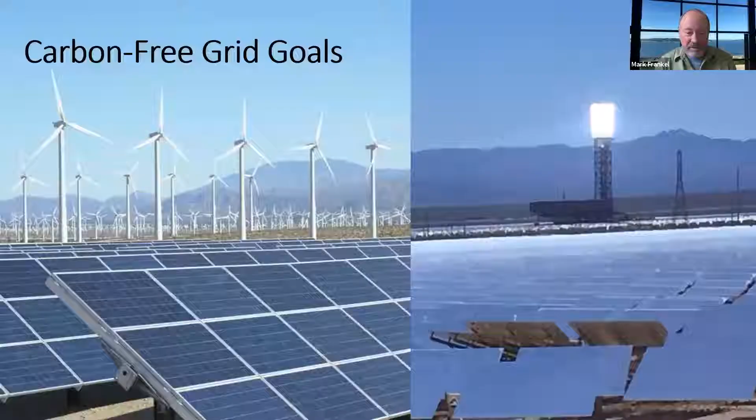Great, thanks Ben. I will say this is an unenviable task to introduce a topic that's going to take us years to resolve in 5 minutes. And I will also tell you, attendees, that the panel group here has been talking about this for years. So if we get carried away in acronyms and topics that you don't understand, please ask for clarification. So I'll pick up my pace so I can get through this really quickly.

So you all know that we have set grid carbon-free goals for the grid in the US. Some regions are tackling this aggressively. The West Coast and East Coast have really aggressive goals to decarbonize the grid. There's a lot of renewable energy sources coming onto the grid, and these are less controllable. They're more episodic, and we can't dispatch them in the same way as we can conventional resources. But even though we have all these new renewable resources, we still need peak load at peak times, whether that's coincident with the renewable resource or not.

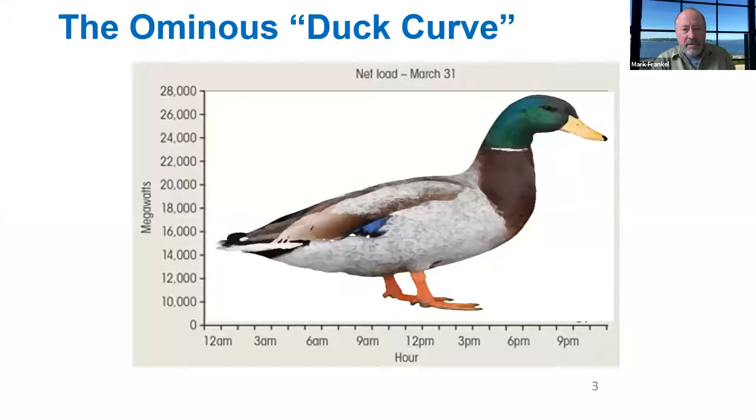So you've all heard of the duck curve. Next slide, please. This is the way it's playing out in California as they add solar to the grid. In the middle of the day when the sun's out, there's more and more sun available, so a greater and greater percentage of their daily load is generated by solar. But in the evening and in the morning before the sun comes up, they still have the same peak load as they ever had. So the head of the duck, if you will, on the right side, you can imagine their peak load is just as big as it ever was, and it's after the sun goes down.

So they still have to have all the same grid resources, the peak power resources on the grid available to meet that load, even though they never get to use those during the day because the sun's out. So those resources are more and more expensive to run relative to the annual use of those. And so the utilities are driven to start thinking about how can we change the shape of our load to match the shape of our resource.

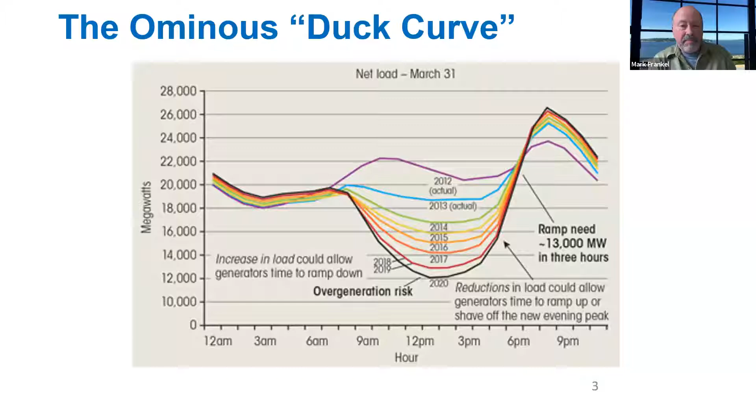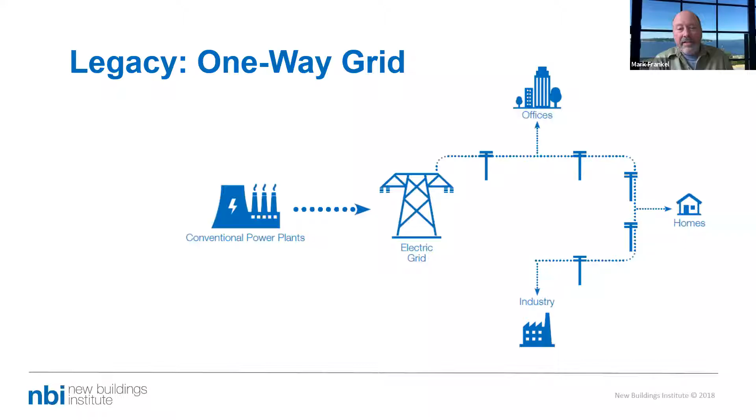Next slide, please. So the legacy grid, of course, the conventional power plants were able to distribute load to buildings and whatever loads in a fairly predictable way, and it was always one direction. It was always the utility supplying the power that they anticipated was needed on the grid. Next slide. The new grid is actually much more complicated, more like a game of Tetris, because there's buildings and cars and all kinds of things putting energy into the grid and taking energy out of the grid at all times.

And it's very, very complicated. The amount of data needed just to control this is massive, and few utilities are really capable of controlling this in the same way. So now we need much more interactive control, and we need these individual loads to respond, to be able to respond, control, and influence the way they interact with the grid. So what does that mean at the building level?

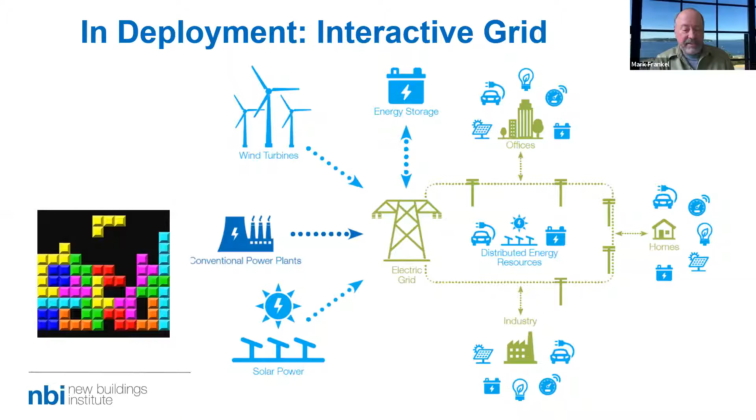Next slide, please. We can think about the load shape of the building. If you have a base load, and very oversimplified, say an office building where people arrive in the morning and the load increases through the day, and we get to the point where we have a peak, and then as people go home, it drops off.

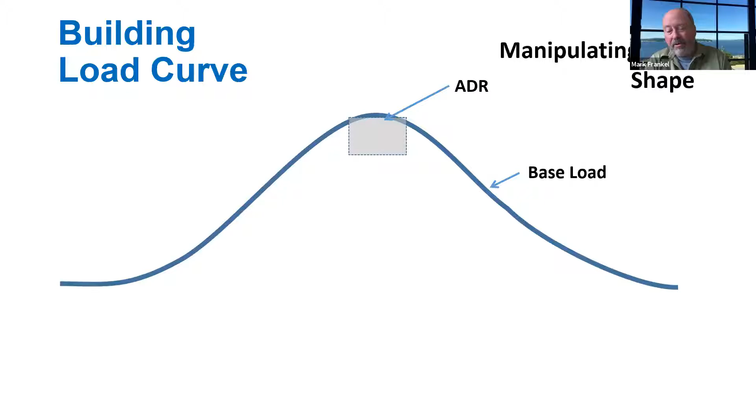So the original way to think about load shedding was automated demand response, and that's the little box at the top there where the utility says, we have a crisis, we need to reduce our load, can you help us? And some percentage of the building stock says, sure, we can cut our load by 15%. They turn off a chiller for an hour or what have you, and that's the automated demand response there at the top.

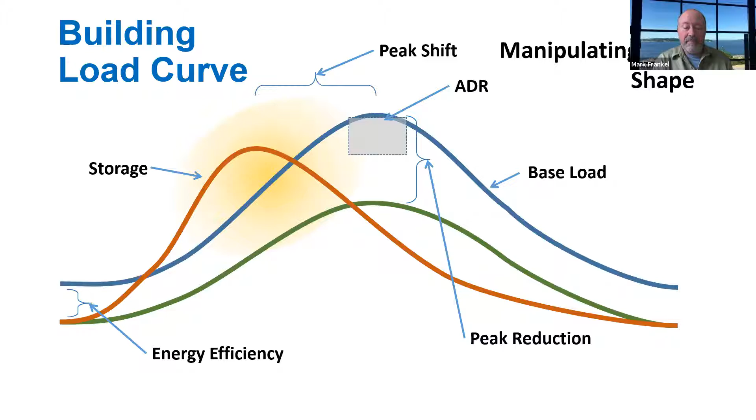But now we're talking about more complicated things, like shifting the time of the building peak. So if you have a lot of sun coming in the morning and you want to shift to use more energy then, maybe with a battery system or whatever, we're changing the shape of the building load to match the availability of resources. I want to point out that there's also a role for energy efficiency still, because we're reducing the total load on the grid, which is good, and we conceivably are reducing the peak load on the grid, peak reduction. So all these are different ways to manipulate the grid, the way buildings use energy and interact with the grid.

Those shifts are referred to in different terms, which you'll hear: shift, which we change the peak; storage, where we might capture energy and use it later; shape, shed, which is reducing total energy use; and shimmy, which is changing the nature in a very short term to manage load energy quality.

So zero net energy buildings have played a role in this shift very significantly. They were maybe some of the first to start pouring energy back into the grid in a somewhat uncontrolled way, as individual buildings build PV arrays and expect the grid to take that solar. So it's important to think about the role of net zero energy buildings in grid integration.

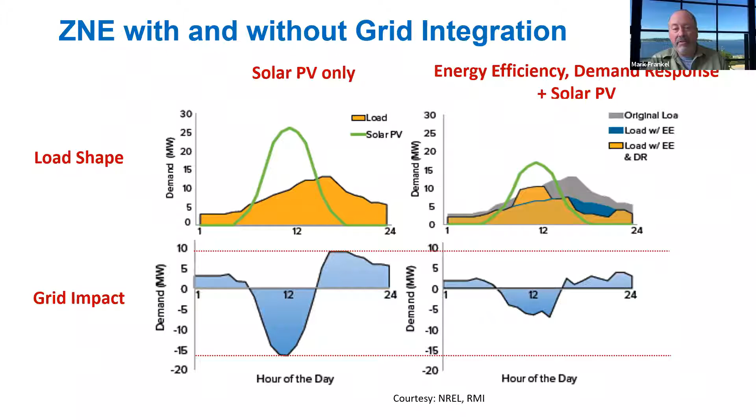This kind of load flexibility, from a study by the Brattle Group, will represent a 15% reduction in peak demand by 2030. And I guarantee you that as more renewables come onto the grid, utilities are going to be more and more incentivized to send a price signal to make sure buildings are responding to their ability to provide peak power.

So finally, I want to point out that this is definitely changing the building industry. We're going to have to respond in real time to changing utility price structures. Designers are going to need to understand and incorporate these strategies that allow buildings to interact with the grid, and this is going to play out for building owners and commissioning agents very much so as well. This is going to be critical to building services, comfort, and reliability. Thank you.

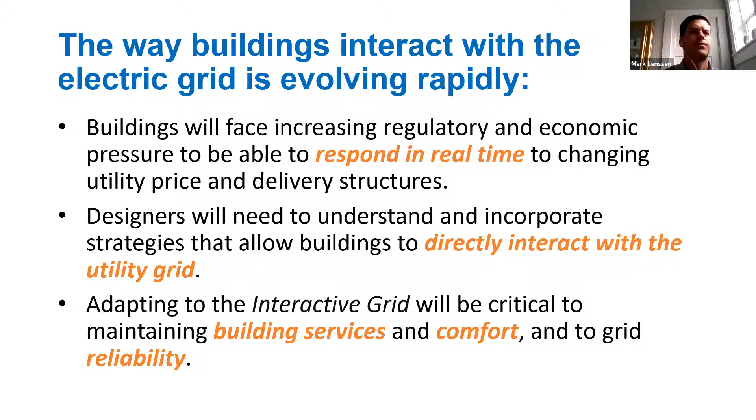Yeah, thanks Mark, good question. So I think there are a couple of key differentiators from how we approach our buildings today - this is true in general as well as how it applies to demand response programs. First is the interoperability and intelligence between buildings and the grid. The second is this level of interoperability and intelligence across building level systems - how we heat and cool and light and fuel our cell phones, in our homes and office buildings. And then the third is really this concept of load flexibility and demand-focused optimization, not just energy-focused optimization.

So really, with demand response programs today, they're often manual. I've heard them referred to as sneaker DR - literally somebody in their sneakers runs around the buildings flipping switches and turning things off. And it's a fairly static interaction - kind of surgical demand response events, just responding to a couple-hour period of time, one-way signals. Oftentimes demand response is met with fossil fuel resources, which is helping but hurting in another way - helping the grid but hurting in another way.

So I think in the future we'd really like the ability to send and receive and respond to utility price signals in real time. And also, one interesting ability would be for buildings to actually send any potential load flex opportunities they have back to the grid, so it could be more of a dialogue. I'm going to focus on that first row. DR today also targets mostly large commercial and industrial customers, and the penetration across the US was less than 10%. So I think there are opportunities to not only make DR programs more impactful, but also significantly expand their participation. If we go to the next slide please.

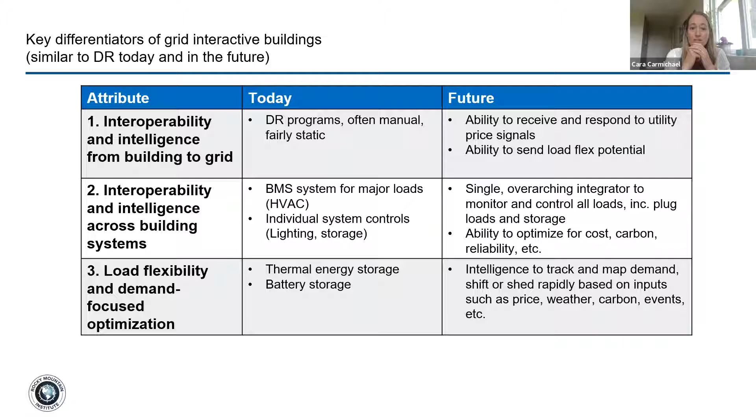And as Mark Frankel began to touch on, buildings drive 80% of grid peak demand. So DR is a really important solution in the market today, and will become even more so as we have higher penetrations of variable renewable generation on the grid. These peak times are also really expensive - more than 10% of grid infrastructure costs are spent to manage less than 1% of their time to meet the need during those spikes. So it's super expensive and likely carbon intensive times of day.

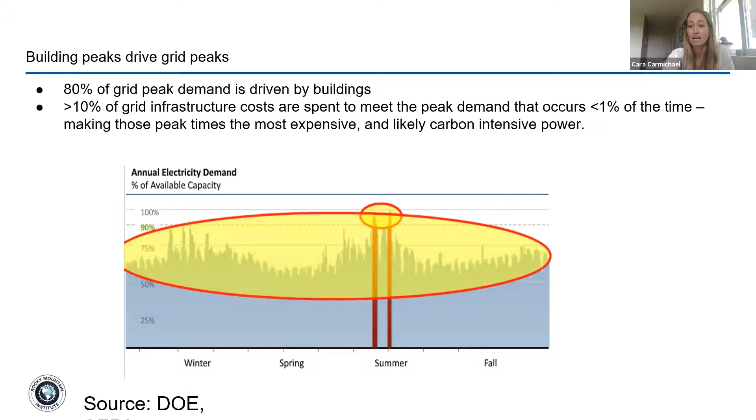Next slide. So just to touch on, when we're optimizing for carbon versus cost, those end up looking like pretty different solutions in buildings. You can see demand response programs are often targeted in the summer and shoulder seasons, in the afternoon hours - kind of where that blue box fits. But if we're looking at the carbon intensity on the grid, that's pretty variable across seasons, and especially within different days on the grid. So if we're optimizing for carbon, we're going to see a lot more seasonal shifting, which is something we're trying to get better at from a systems-wide perspective. But we're also going to see a lot of shifting within hours of the day, and that's a real opportunity we can harness today with the technology that we have in today's buildings.

So I guess I would part on the demand response piece with - I think there are a couple big opportunities in demand response programs today. Integrating energy efficiency and demand response programs - today they're fairly isolated, but merging those two, thinking more on a real-time basis, is a big opportunity. I think also this conversation about empowering aggregators, ESCOs, curtailment service providers to actually provide solutions in a way that often utilities aren't nimble enough to do - but I think if we can empower them to create more of these solutions, it's really going to be a big part of the market.

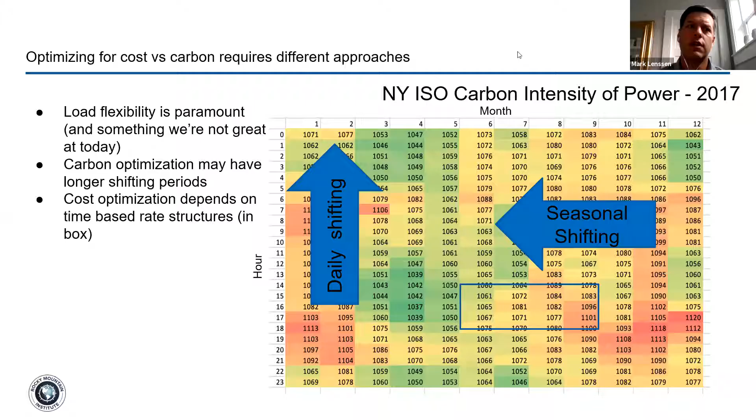Do any other panelists have any thoughts on that too? Or have you seen examples of where utility programs or aggregators have merged energy efficiency and DR?

Yeah, there's been some projects in California where the utilities were looking at controls retrofits. Retro commissioning is a great example of where you go in and get the controls working. If you want to do automated demand response in a large building, you really should do that commissioning first and make sure your temperature set points, your sequence of operations, and your supply reset are all in place first. You don't want to start manipulating a sequence in the controls on a building that's got fundamental controls problems. That's one of the foundational things for large buildings.

And in homes, similarly, if you put a smart thermostat in a home that has a lot of leaking problems, a lot of windows and no insulation, it's not going to perform as well as a building where you've gone in and done those energy efficiency improvements.

Great, thank you, Mary Ann.

Okay, so for the next question, Mary Ann, back to you. If grid interactive efficient buildings are about a dynamic two-way communication between buildings and the utility, help us understand what data are being shared and an idea of the technology needed to make that happen.

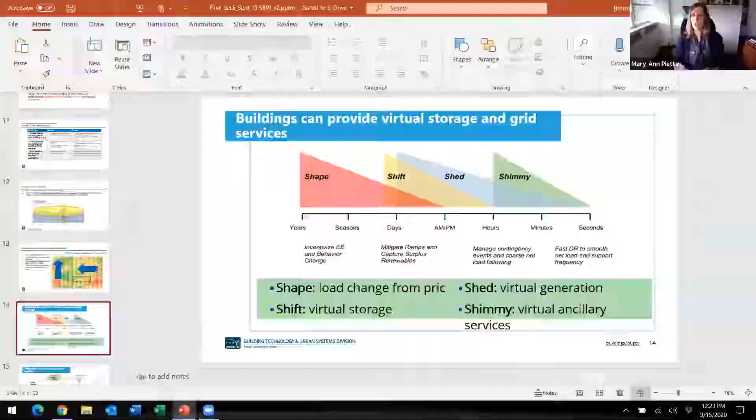Okay, so my first slide, I'm going to build off where Mark started, where he mentioned shape, shift, shed, and shimmy, and I'm going to talk about what those things mean and how we automate them. Shape is responding to tariffs, and time of use tariffs are coming to many parts of the country, in the Northwest and California. So we want to shape that electric load, and that may be something we do every day or seasonally where the prices change.

The most important thing I want you to remember is that we're working on ways to get the prices to the devices. I'm going to show you in a moment a picture of California's price server framework that we're working on. But when we think about automation, we need to send some sort of signal. Things like OpenADR and CTA 2045 have been tools to get this automation to devices. And then the device has to respond.

The device may respond by responding to a time of use price, or it may respond to a more dramatic shift call, like we thought about when we see the duck curve. We want to use more electricity when it's clean and less electricity during the dirtier parts of the day, around dinner time, when there's less renewable energy.

So we shift load by getting maybe even a carbon signal or a price signal. In the future, you might be able to have a controller that says, I want to be super economical right now, or I want to be really clean, I'm willing to pay a little more to be clean, or maybe those are together. So we want to look at things like WattTime or OpenADR and be able to receive signals that require these end node technologies to respond.

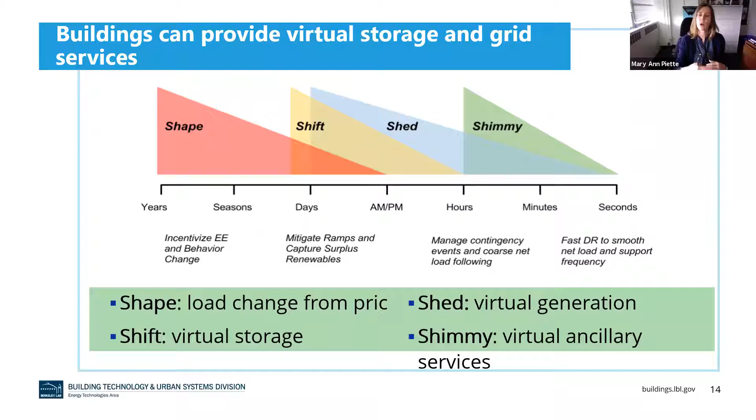If we can get a lot of this from demand side systems, it's lower cost than going straight to batteries. So we want the buildings to be part of our ecosystem. I also want to mention something called set and forget — you can say, I want to do this at 20 cents, and I'm willing to do a little bit more at 30 cents. And if we set those prices into our automation, our devices will respond if they have a 24-hour ahead price signal of some sort. Go ahead to the next slide.

So this is an example of what the California Energy Commission is proposing for a price communication system. We are moving towards digital tariffs. It's a very exciting time. We've been trying to do prices to devices for quite some time, and we now have a lot of technology that's going to allow us to do that. So the utilities would be required to offer a signal associated with time of use, critical peak pricing, real-time pricing, or even transactive pricing. These signals would be communicated. You can see 5-minute prices on there and even FM broadcasts. On the right, you see the different types of devices that will be enabled to listen to and respond to those signals, and we want to provide an ecosystem.

One of the things that Kara mentioned was the need to do energy efficiency first. We don't want to have inefficient loads responding. We still want to invest in energy efficiency first and lower the load and then make the load dynamic. So again, we're looking at not just how much energy you use in your home or your building, but when you use it, and trying to get your consumption patterns aligned with grid signals to allow us to have a more affordable, more reliable, and cleaner grid. I'll stop right there.

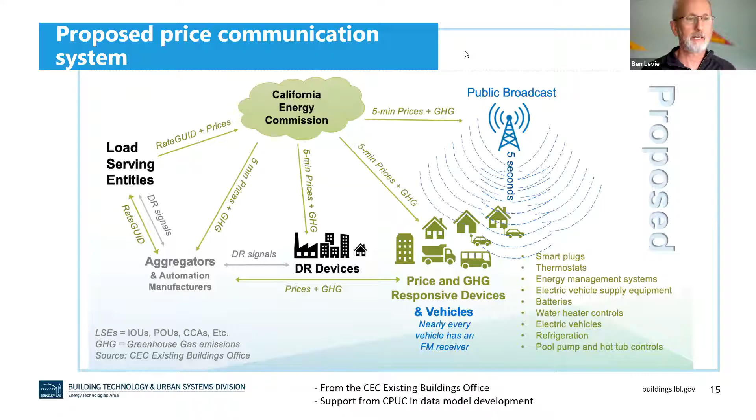Okay, thank you Mary Ann. Just a side note, or maybe something the panel can respond to: I read this morning that the California ISO said the reason we're having brownouts is because you guys aren't allowing us to have enough generation capacity. So what we're posing here is a solution which would not entertain that, going the other way and just having lots of demand flexibility. Do you guys think that is the solution to California's problems going forward, or do they still need dispatchable energy in California?

I'll take a first pass at that, if I may. It reminds me of how we got efficiency in the Northwest and California, for that matter. Remember the WHOOPS program, where we were going to build all these expensive nuclear plants, and then we discovered we were putting enough debt on each individual residential meter, in the order of $40,000 per house or whatever, and that whole thing collapsed. The feds bailed us out by requiring us to look at the least cost plan for new electricity supplies in the Northwest. So that's why we have this proud history of efficiency, because that turns out to be cheaper than building nuclear plants and a lot of other plants.

Now it's going to be even more that way when we think about meeting certain times of day loads. It's really expensive to run peak gas plants or whatever compared to solar, which is the cheapest new energy out there. It's cheaper to build new solar than to run existing coal plants now. So that equation about least cost resource is going to very much come into play with time of use.

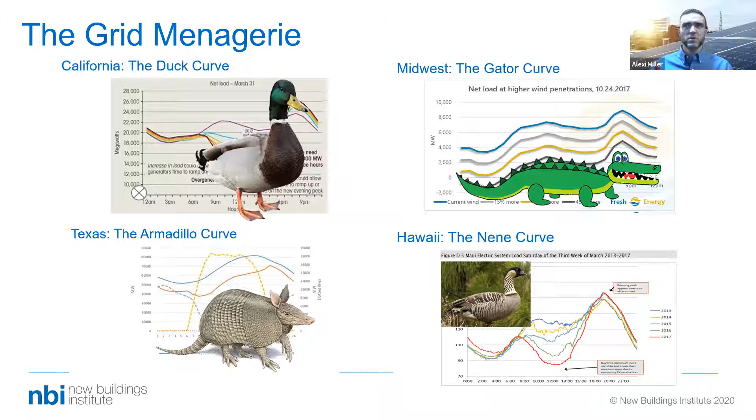Maybe actually, I think these are slightly disordered for the way I think it might make sense to do this. Can you go to the next one? Yeah, okay, perfect. This is what I was hoping to see.

Pierre Delforge from Natural Resources Defense Council has this idea. He likes to think of heat pump water heaters, for example, as clean energy batteries. So this is a graph from Pierre, and this is an example of what you might be able to do with a device. This could be in a home, or you can use heat pump water heaters certainly in commercial buildings too, to be able to shift the load around and adjust the load shape that this device is contributing to.

In a single family or multifamily home, a whole lot of the load is actually water heating. So this could be a pretty significant aspect there. So what this is doing, and I should caveat that the way we have manufactured, installed, and operated heat pump water heaters today doesn't necessarily do this. This is kind of what might we get out of a technology if we did all kinds of neat stuff and really used it to its full potential.

You could, for example, take a signal, say, oh, today would be a good day to preheat my water, use up some extra power during the day when we might have a lot of abundant, clean, and affordable electricity. And then you can coast through those afternoon and evening hours when there might be higher water demands, when folks come home for the day, without needing to really run that heat pump water heater very much, if at all.

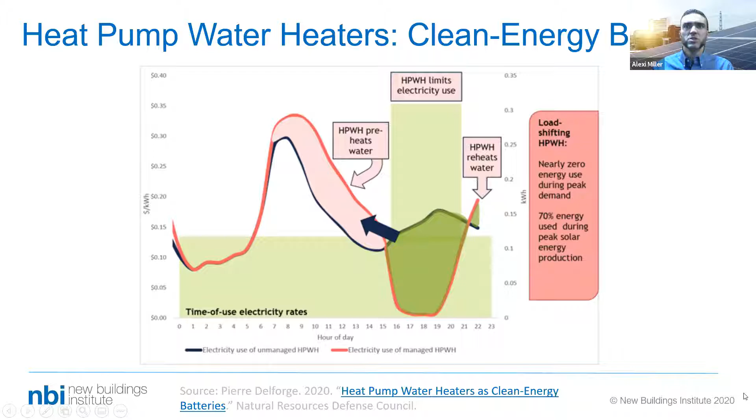So what we've been trying to do to build the bridge between what the grid needs and what the building can do is put together some metrics. And I think the next slide shows several building grid integration metrics. These are the ones we've published through Grid Optimal. They're not the only metrics, and we'll cover a couple more in a minute.

But these are some of the categories that I think it might be useful to give a brief overview of, to get an idea of what buildings might be able to do and how we can measure it. Because having the ability to measure it means we can put it in programs, we can give incentives for these kind of performance outcomes, and it can go into other things. One example of that is LEED. We anticipate pretty soon here having a grid harmonization pilot credit that uses these metrics that you're seeing.

So I'm not going to go through all of them, but grid peak contribution, that first one, is a lot like what we're talking about today. That is, how closely does the building's load shape line up with the grid's load shape over the whole year or at specific times of the year? You know, how similar are these two curves?

On-site renewable utilization efficiency has to do with maximizing self-consumption of on-site renewables, which can have value to the grid, especially in a distribution sense.

The third one I want to cover specifically is grid carbon alignment. Just like grid peak contribution is about matching the grid system curve, megawatts, with the building demand curve, kilowatts, grid carbon alignment is similar, but it's about how closely the building's demand lines up with the carbon emissions, or greenhouse gas emissions, associated with electricity on the grid scale. Are you using a lot of energy when it's dirty, or are you using more of your total energy when it's relatively clean? And then there are a couple others around flexibility and resiliency as well.

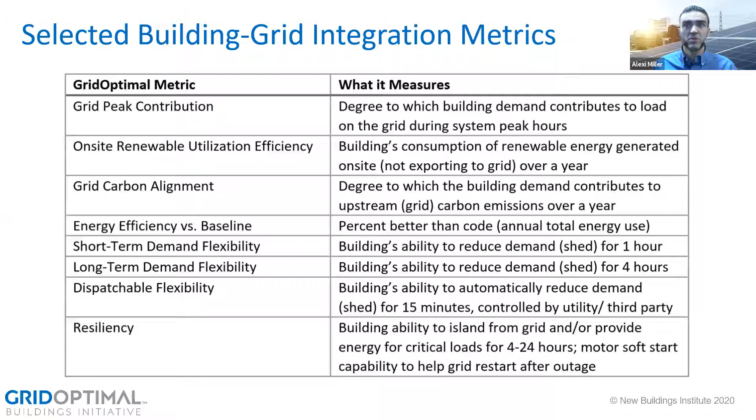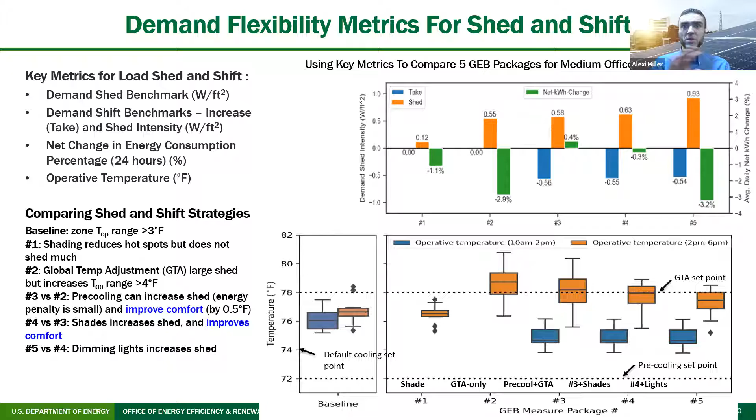It's also useful to think about things in watts per square foot. So if you go to the next slide, these are some metrics that Mary Ann and her team are working on to talk about shed and shift. Maybe I'll just pass over to Mary Ann to give a quick overview of these metrics as well.

Thanks, Alexi. I know there's a lot of complexity here, but the main thing I want you to take away is the watts per square foot in the upper right-hand corner. Blue is taking energy and orange is shedding it.

These are events that are for 4 hours where you have a commercial building and you've done something, like reset the temperature. When you reset the temperature, it gets warmer. The bottom is what we call operative temperature, which includes some radiation and thermal comfort metrics, so it's not just air temperature, because the temperature around you influences your comfort. We want to make sure we understand when we reset the temperature 3 degrees, 4 degrees, how quickly does the building warm up, and that's dependent on the mass.

We also look at shades and lights and maybe pre-cooling, so the building acts as its own sort of thermal storage. Some buildings do better. If you have a lot of surface area to volume, it's going to be harder to do, or if you have a lot of windows, it's going to be a little harder. But a library is a great one, with all those books and fewer windows.

So the watts per square foot is this number here, where we get maybe half a watt a square foot. We divide by the square foot so we can compare buildings of different sizes, a 100,000 square foot building with a 200,000 square foot building. And we show in green the net kilowatt hour change. If we pre-cool, we don't want to waste that energy.

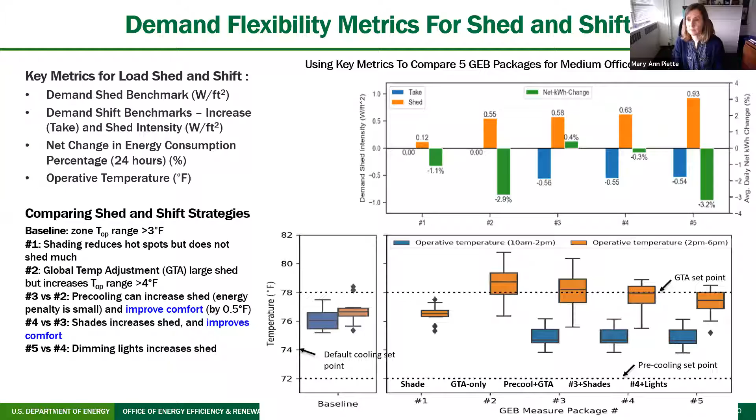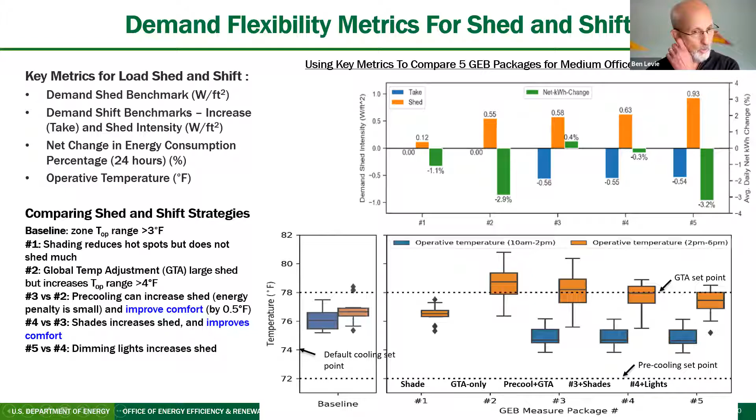Okay, terrific. Just to keep things moving, I wanted to ask Mark if he could kick off a discussion about how we do this practically, so how can both the building owners and the utility derive value from having the grid enabled capability. We can kind of go around the horn or keep this a lively discussion at this point.

Sure, well, I'll toss out four quick things that we can talk about. One is, I personally think time of use pricing is inevitable.

Our utilities are going to be in a world of hurt with what we're requiring of them if we don't give them a way to incentivize a different load pattern in our building stock. So I think it's inevitable. We're seeing it in California, New York's had it for decades. It just doesn't happen to be about renewables, it happens to be about midday peaking in the city. And even in the Northwest, Snohomish PUD has adopted a time of use pricing pilot program that they're trying to get people to respond to.

So it's coming. There's also the carbon goals, as Alexi mentioned. I've worked with projects, we probably all have, that are setting carbon goals, and they want to know when should they use energy to reduce carbon the most. There's a lot of big industry that's made carbon commitments, and individual projects too, and we're going to see more of that becoming a motivator. In the Northwest, we have a law that our utilities have to be carbon free by 2045, and that's going to drive it as well.

PV integration - you hear a lot of people around the country whining that the utility won't pay for their PV at the rate they charge them for power. It's not just that utilities resist PV because they don't control it. In California, they pay other states $50 a megawatt to get rid of their PV in the middle of the day. So they're paying other states to take power that they have to buy from customers. That is not a sustainable economic model. So if you're thinking about net zero buildings, the idea that you're just going to dump all this PV on the grid and make them be your battery, I think that's going to have a limited run.